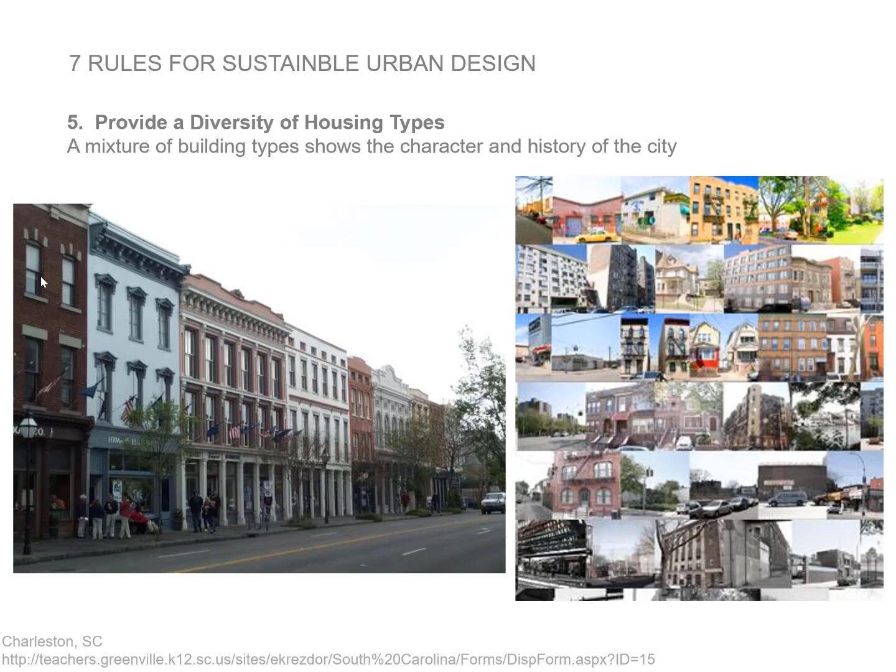They're going to be more long term. So you have this mixture of housing types that becomes historic districts and shows the character and history of the city. Over time, it just increases its patina. So it's a good thing.

Another thing you should think about is tucking housing types into these different mixed-use developments. So row houses, townhouses, studios, and all these types of things can be tucked into these areas.

Ground floors that are commercial, with nice facades and glass facades, that people can look into and shop. But then there's housing opportunities above them as well.

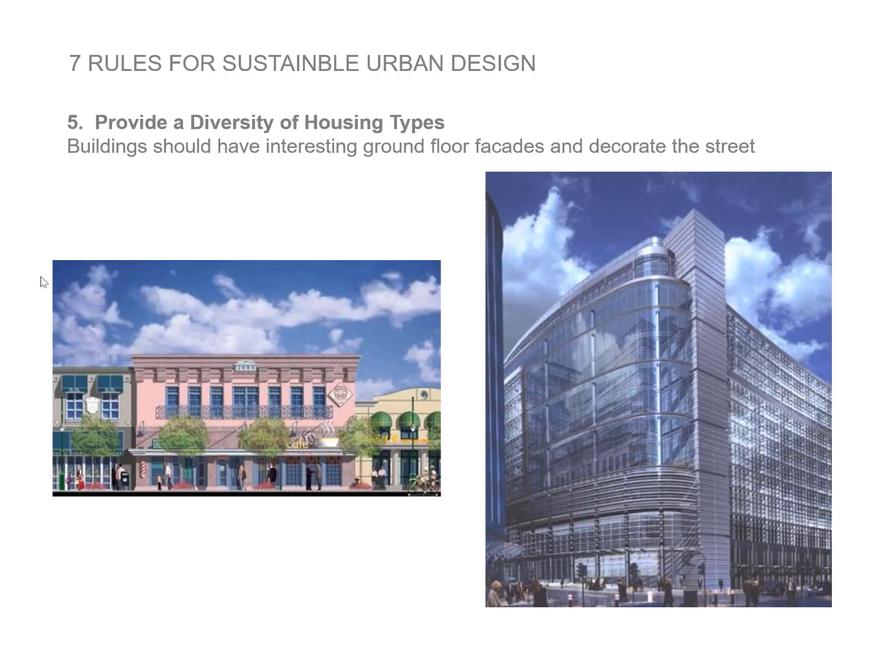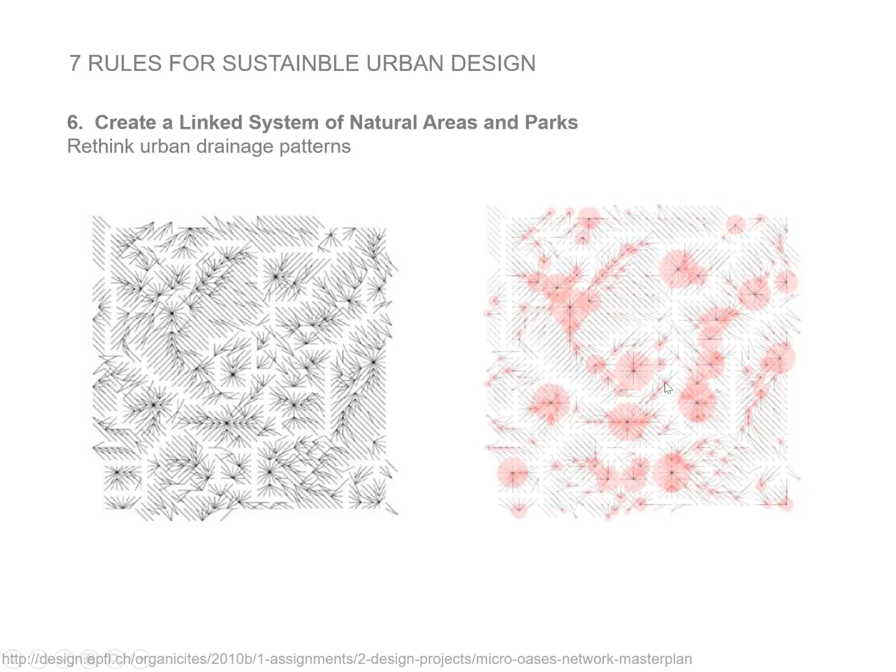So this is a cool diagram of drainage here on the left, and these are park spaces here on the right that overlap where those pools of drainage areas go to.

The important thing is you need to understand what's there now, and specifically in your site there's really not a lot. I think most of the groups have thought about it. But also, how can you improve it?

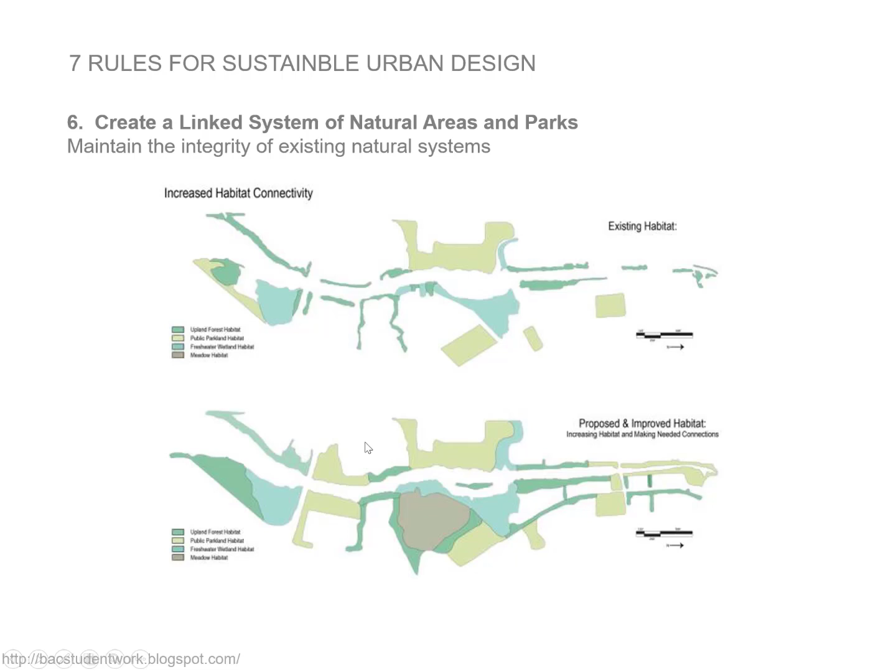It's simple enough to map out what's there up at the top, and then try to connect what's there by making different programmatic elements to link these things. So maintain the integrity of what's there, enhance it, connect it, and make it better.

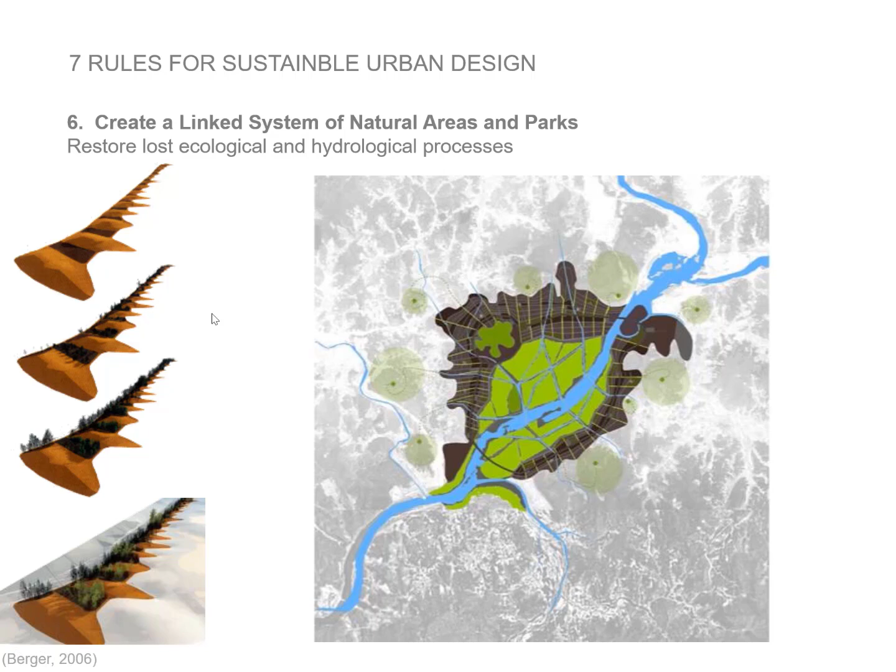Anything that's needed, especially on these coastal areas — think about phasing in or restoring habitat restoration of lost ecological areas. And remember, that's going to take time, so craft out flexible urban space for that and allow it to grow over time.

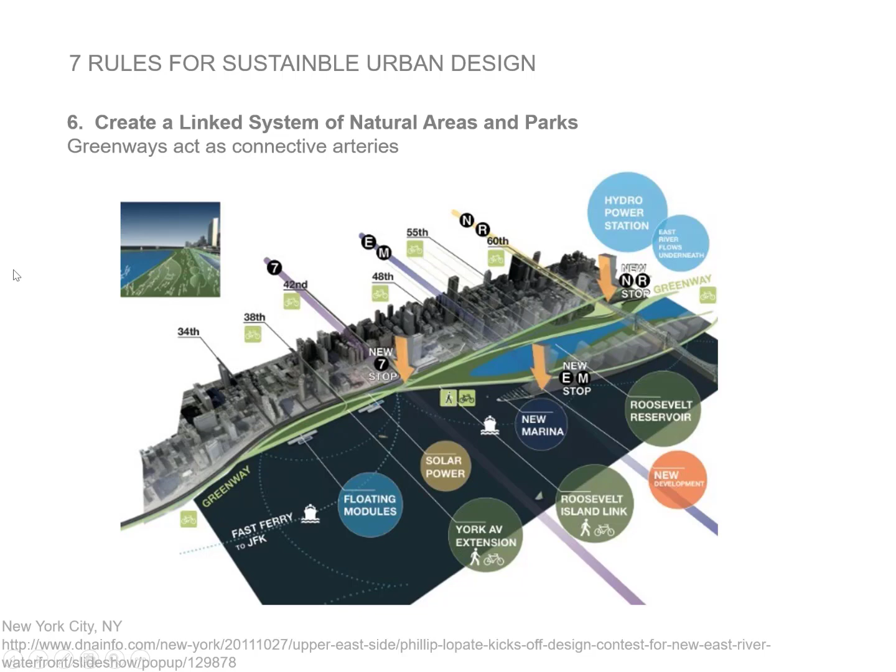As we talked about earlier, if you need a way to connect, think about creating greenways or eco streets, street trees, all these types of things to help connect the different green spaces, north, south, east, and west. They can be along your primary axes or secondary axes if you want.

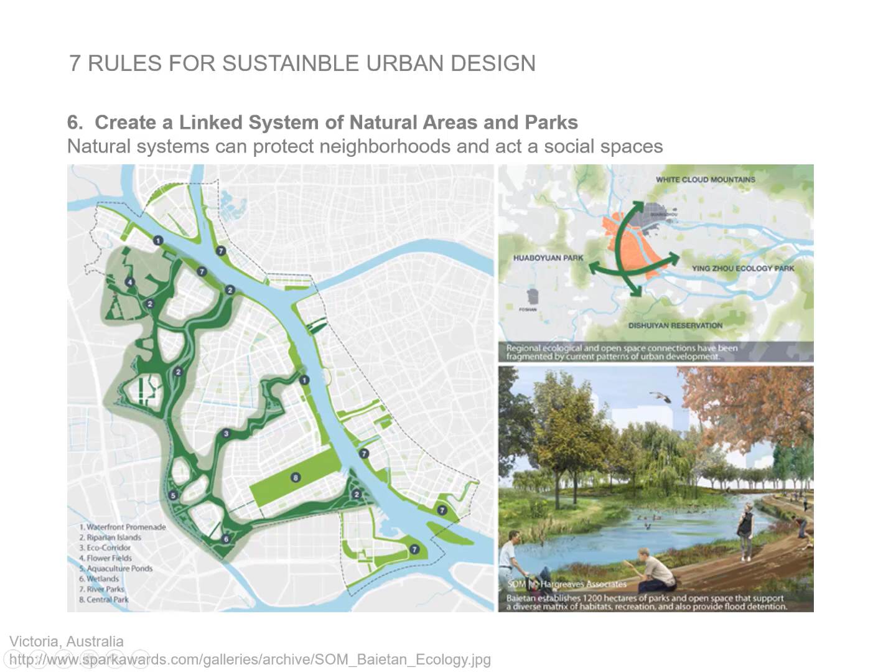And these also provide social spaces, right? So they're helping with drainage, ecological services, species richness, but they're also recreational corridors helping with human public health and social interaction. So present them in a way that they're multifunctional.

And they're not limited to just parks and large scale giant ecological patches. Think about not only street trees, but smaller scale shrubs, the rights of way, the rooftops, all the walls.

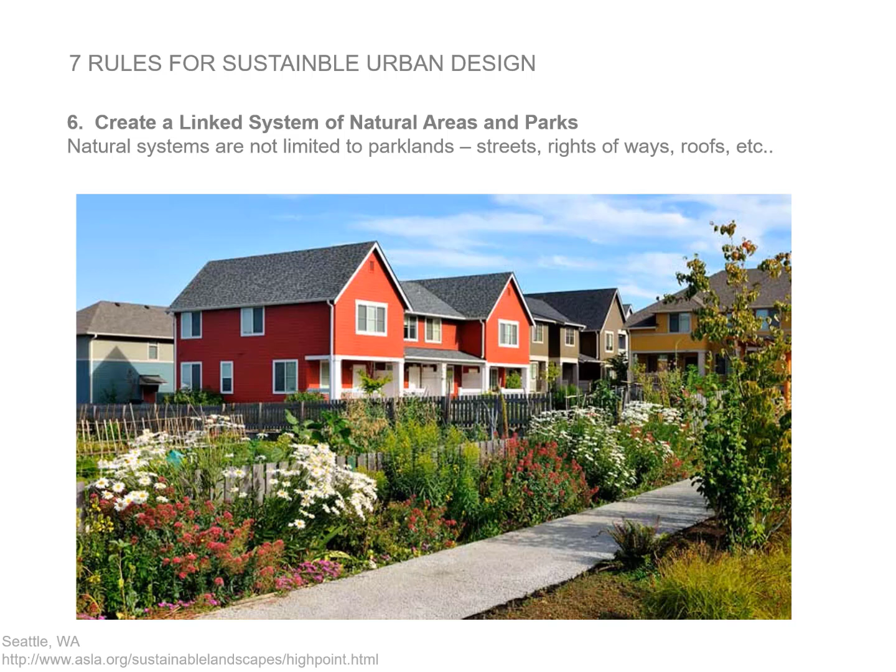They can all be natural systems — smaller scaled, low impact facilities that can assist. So you want to calibrate the regional scale to this kind of smaller scale.

Because you need to think about exactly how your connections are going to fit within the grand scheme of things. So, are you going to — you can't just connect internally.

You must connect externally as well. So when I say internally, I mean the site, and externally I mean to other patches or green spaces outside of the site. You need to make specific reference of what you're connecting to.

So the seventh and last rule is about greener and cheaper infrastructure — smaller scale, low impact facilities that help create these connections. If you think about the way we expand, suburban homes have 4 times as much infrastructure as smaller walkable streetcar neighborhoods.

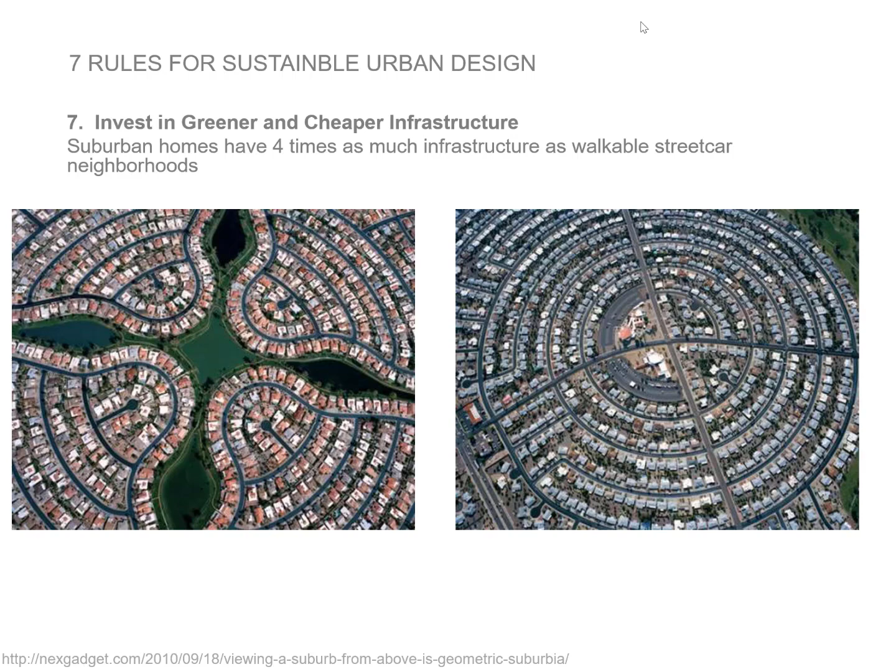If you remember rule number one, restore the streetcar neighborhood characteristics. Because you have to expand sewer systems, roadways, sidewalks, power lines — all that kind of stuff has to go out and keep expanding as development expands.

So if you invest in cheaper — when I say cheaper, I mean greener, because it's not as expensive as engineered infrastructure — you're going to save money in the long run, especially if you develop nodally.

Because if you increase in population, which is what we're doing, that's a necessity for infrastructure increase, especially if you're expanding horizontally. But if we do nodal development, we won't need as much infrastructure, and we can save money. That's what I mean by cheaper.

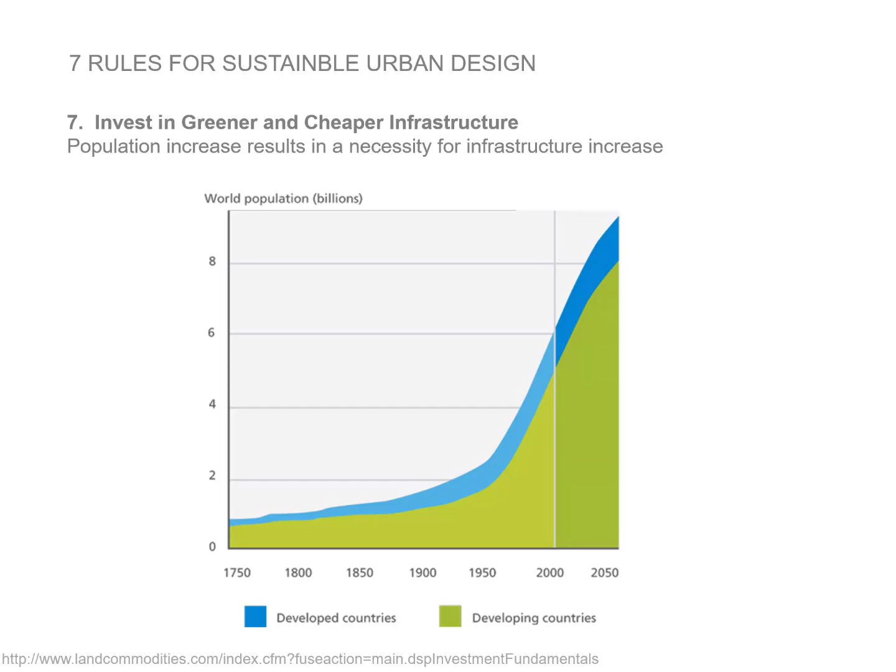So the way we currently urbanize results in significant amounts of more runoff and more pollution. There's a lot more quantity and quality issues when it comes to stormwater runoff and existing urban water.

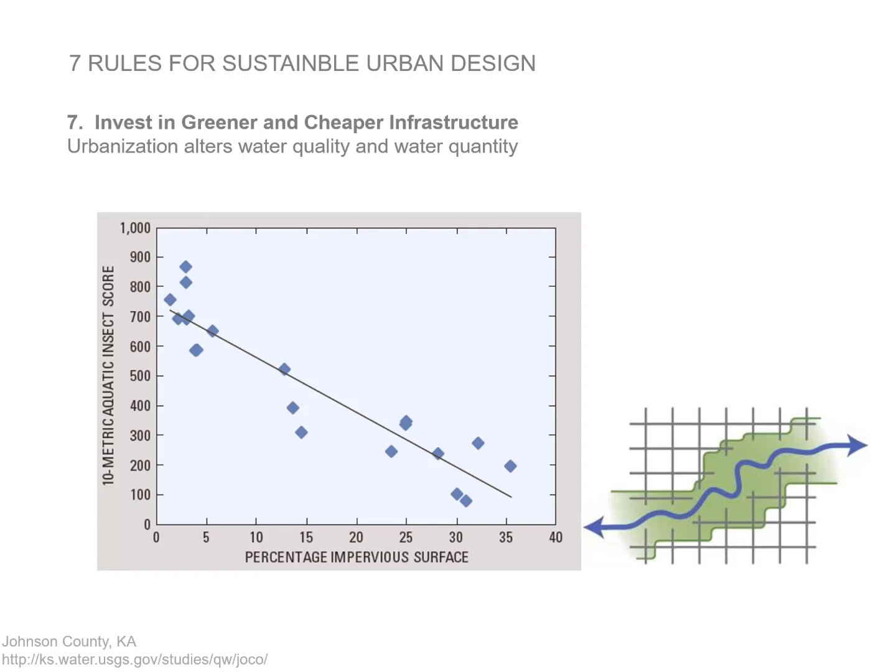Riverways are more polluted, bays are more polluted, all this — and we have to take into account how to fix this kind of stuff.

Typically, what happens is it runs off from an impervious surface into a sewer system. That sewer system goes directly into some sort of water body, and it's not dealt with anymore.

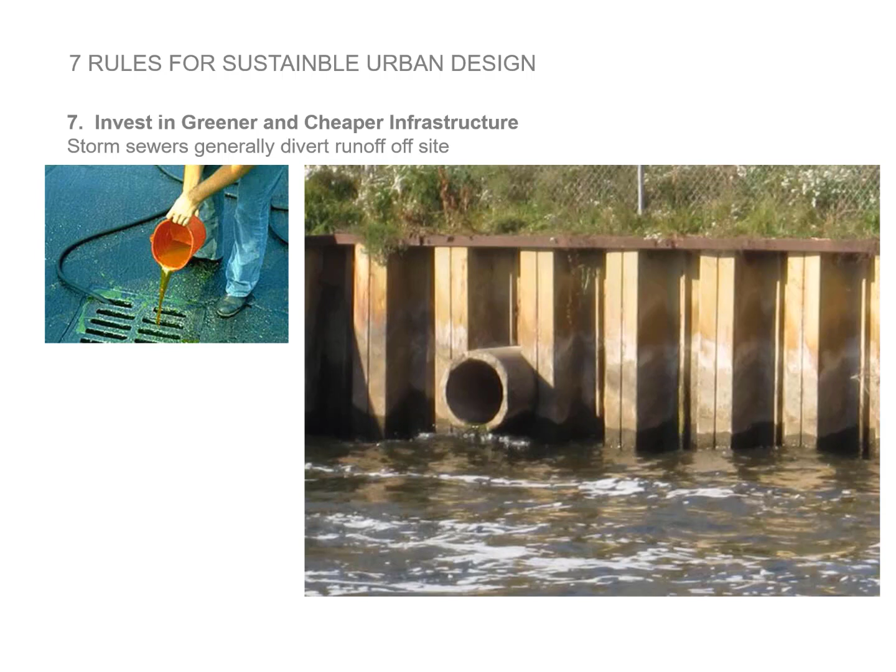So we need to think about better ways to filter or remediate runoff and allow natural processes to fix these before they get into larger water bodies. That's typically done through smaller scale green infrastructure.

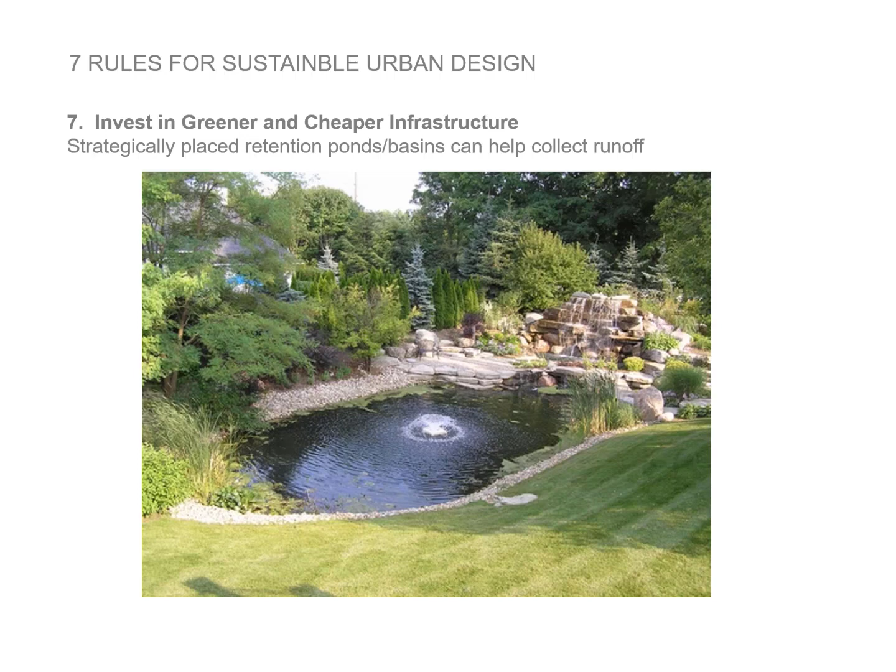So the first way you can do it is locate some low points where it's going to be flooded on site, and strategically place retention ponds or detention basins to help contain runoff, and design them so there's a park around them that's beautiful and functional — aesthetic.

Things like pixelating the parking lots and breaking up larger scale pieces of impervious surface can replace what we call total impervious with effective impervious.

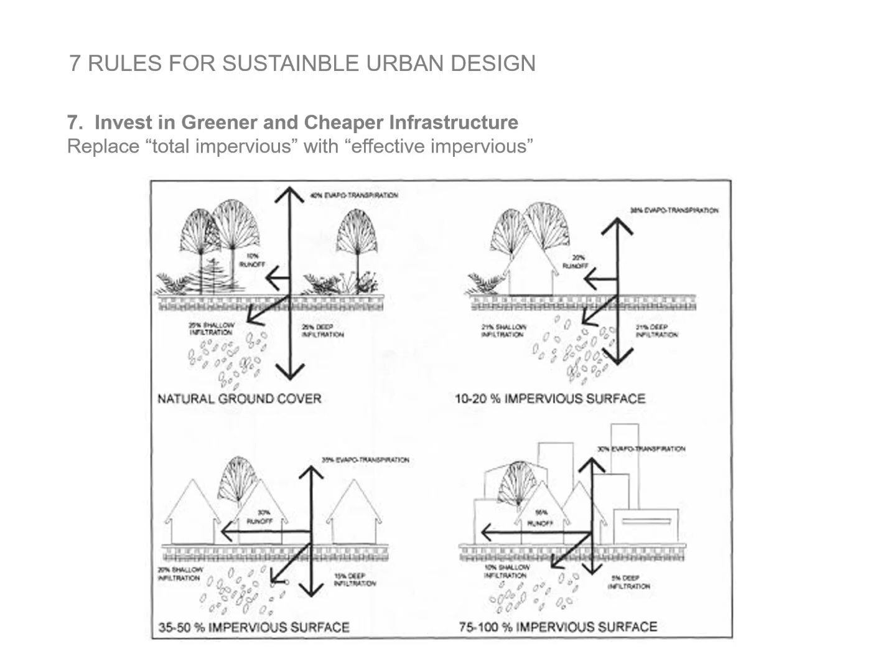So that would be things like bioswales in the middle of a parking lot or pervious pavement — ways of breaking up giant impervious surfaces with almost semi-pervious structures.

So you need to think small scale — rooftops and pervious pavements, walkways and rights of way, fixing parking lots, rooftops, walls, these kind of things.

If you connect them and address them correctly, investing in green infrastructure, you can typically reduce runoff by around 35%.

If you design them effectively, that's a significant amount of runoff reduction, especially during a 100-year event or larger.

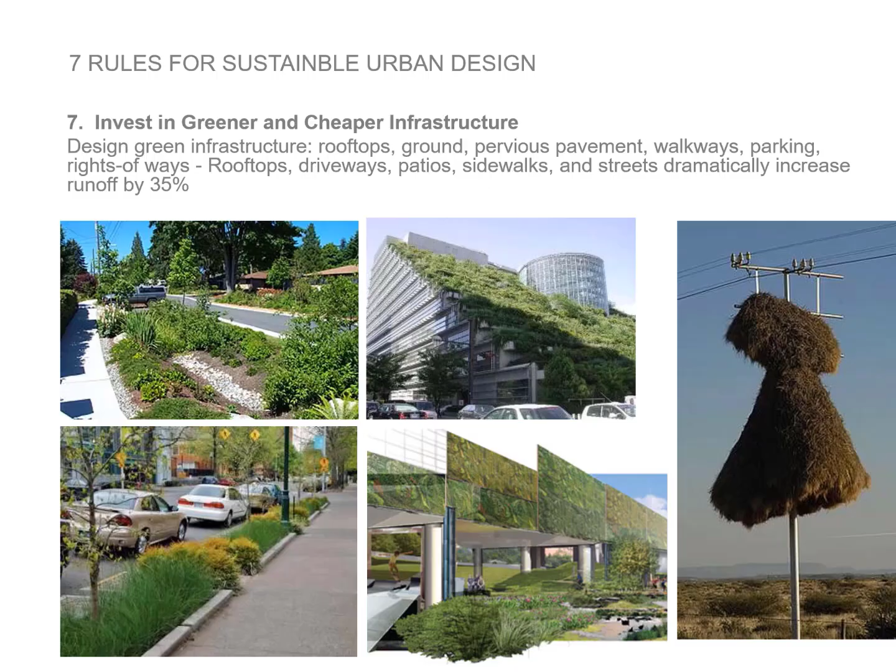So those are a lot of things to think about, but seven overall rules for you guys to follow when you're thinking through this stuff.

And hopefully it gives you some ideas of how to design sustainably — not just specifically for your problem statement, but in accordance with it. Thanks.